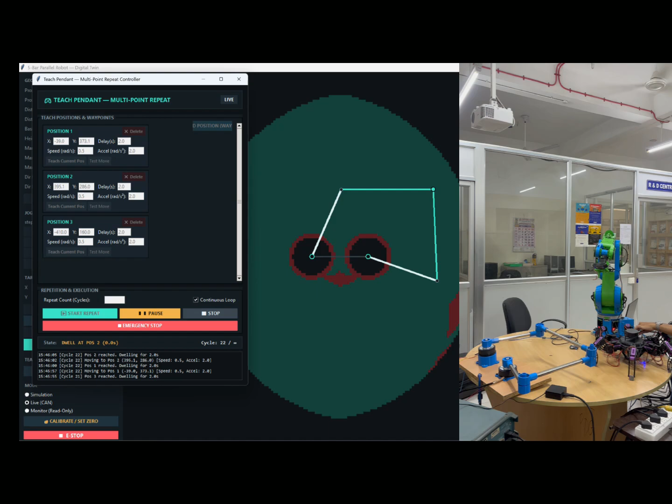Imagine a robotic system where every robot doesn't have to do everything. Instead, each robot has a specialist capability, and an intelligent system decides which robot is best suited for each task. This is our AI-powered heterogeneous swarm robotic system.

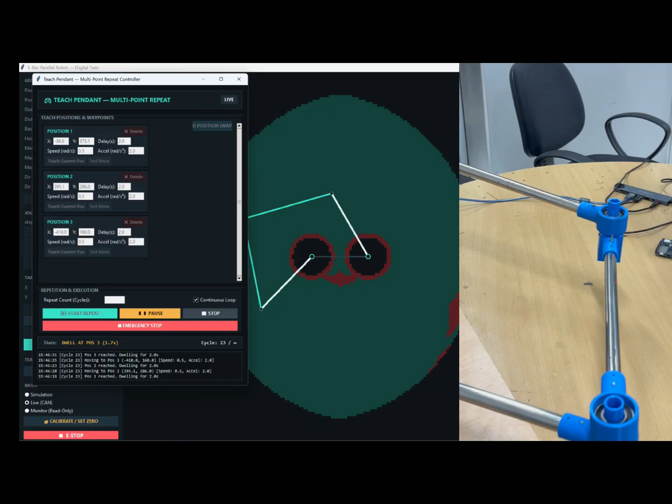Our system combines three fundamentally different robots: an autonomous hexapod, an autonomous six-axis robotic arm, and a high-speed SCARA robot. At the center of the entire ecosystem is the Arduino UNO Q, which acts as our master intelligence and swarm orchestrator.

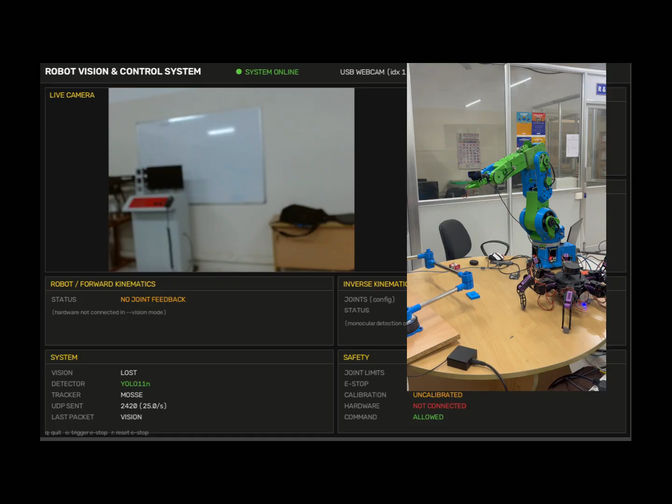So each robot has its own sub-brain, like the six-axis robot has its own Pico microcontroller, and the hexapod has its own Raspberry Pi with Pico, and the SCARA robot completely depends on control from the UNO Q.

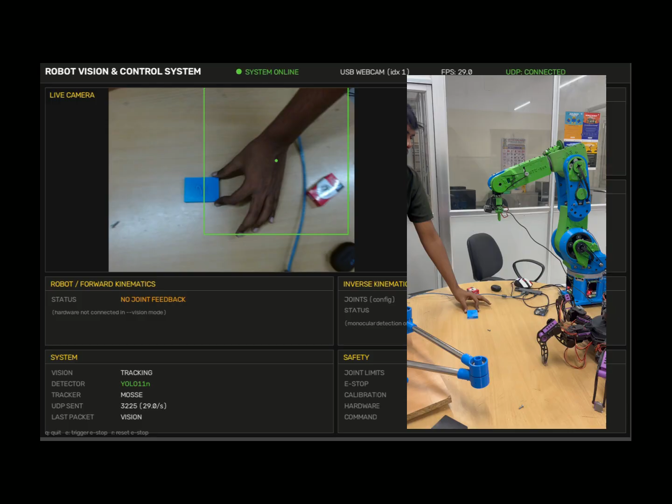Traditional robotic systems are often designed around a single robot performing a predefined class of tasks, but real-world environments are much more complex. A mobile robot may be excellent in exploration but poor at manipulation. A six-axis arm can do complex three-dimensional manipulation, but it can't efficiently explore an environment.

And a SCARA is efficient in fast and repetitive planar operation, but it's not designed for terrain navigation. So forcing one robot to perform all the other things is not a strength. So that's the strength of our project.

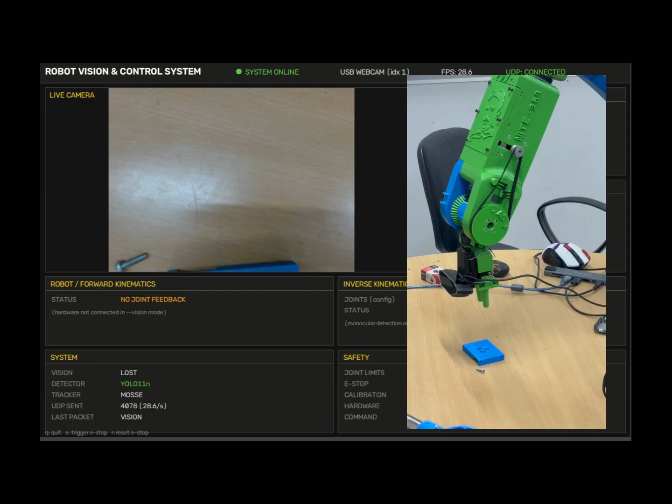The key innovation is the way three robots are coordinated. The UNO Q acts as the mission-level intelligence of the system. It maintains a system state, understands tasks, matches tasks to robot capabilities, allocates missions, coordinates communication, and aggregates feedback from robots.

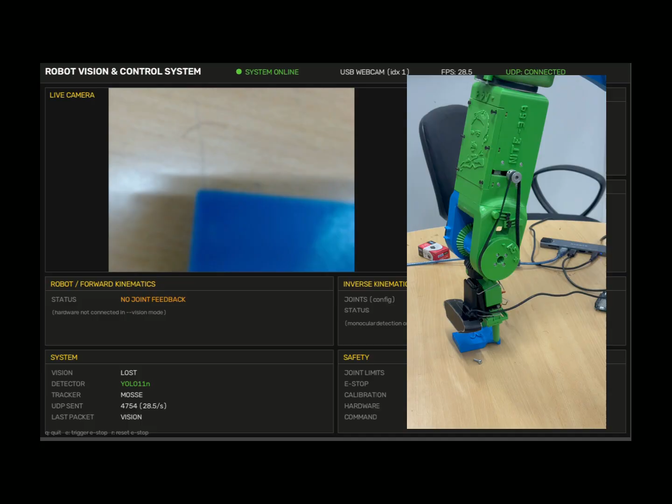Importantly, the UNO Q doesn't need to perform every computationally heavy operation itself, because each robot has its own microcontroller computing all the other things. It just performs the command sharing.

So the hexapod is a completely autonomous hexapod which has its Raspberry Pi and lidar. So it could navigate through narrow spaces and do its job. So the UNO Q assigns exploration and navigation missions and sets goals for them. So it doesn't need constant control. It just needs high-level control from the UNO Q.

So the next thing is the autonomous six-axis arm. It detects objects through a camera and sends commands to our robot. So the vision system processes the camera image, detects objects, tracks the target, and converts image coordinates into workspace coordinates through calibration and coordinate transformation.

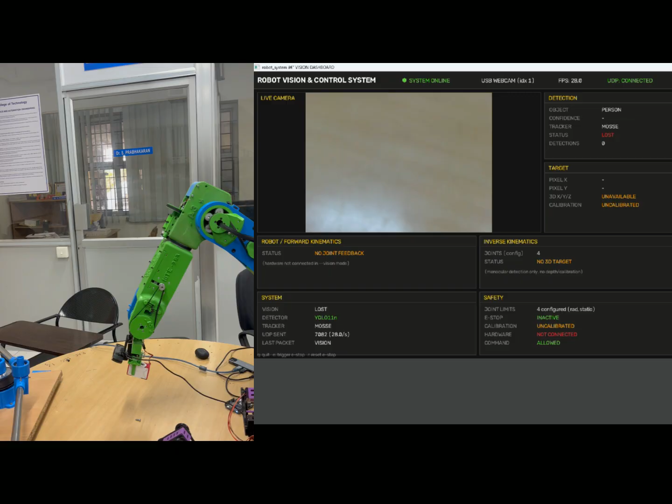The UNO Q receives the manipulation requirements and determines the six-axis arm is the appropriate agent. When inverse kinematics is required, the UNO Q sends an IK request to the PC. The PC performs the computationally intense IK calculation and returns the joint solution. The UNO Q then coordinates the validated result with the robotic arm.

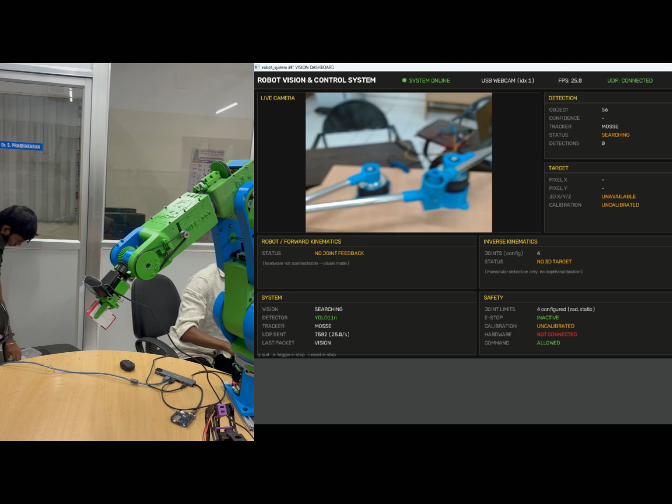Then comes the SCARA part. Our third agent is the SCARA robot. The SCARA is optimized for high-speed planar manipulations such as pick and place, sorting, and repetitive assembly operations.

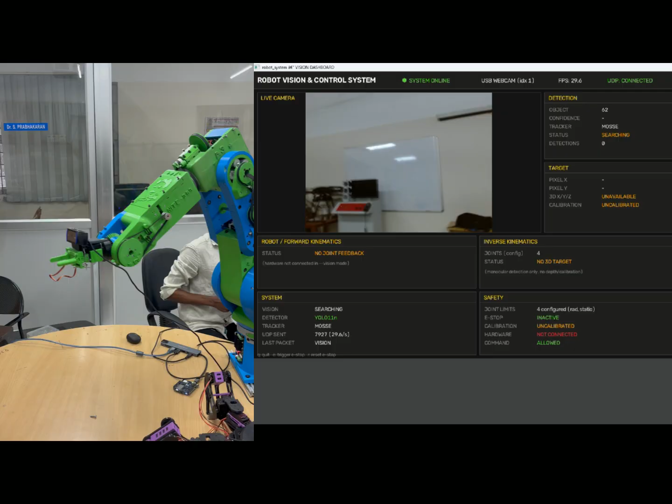The UNO Q determines the task is suitable for the SCARA and dispatches the required task information to the PC. The PC handles SCARA execution and returns the robot status to the UNO Q. So the PC is not the master.

Complete swarm mission. Now let's look at the complete mission: locate the object and retrieve. The UNO Q decomposes the mission into subtasks. The hexapod moves coordinated to the object. Similarly, all three could coordinate and move with the object tracked.

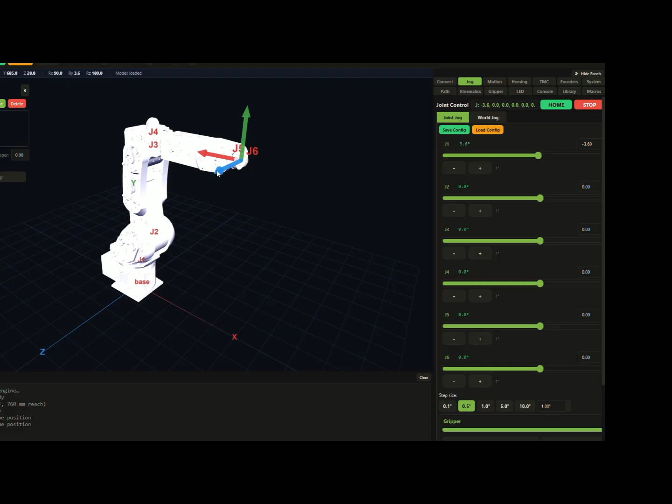So it is not complete swarm integration, but it does its own job based upon how we train the models and how efficiently we use the UNO Q. This system could be improved. The task allocator uses robot capability, availability, health, workload, and task requirement to determine the most suitable agent. This means our system is not simply sending predefined tasks; it checks availability.

Ultimately, our goal is to demonstrate that intelligent robotics doesn't have to depend on one powerful robot. Instead, specialized robots can work together in an intelligent physical system. With the Arduino UNO Q as the mastermind, three heterogeneous robots become a coordinated, adaptive, and scalable physical AI ecosystem. This is our AI-powered heterogeneous swarm robotic system.